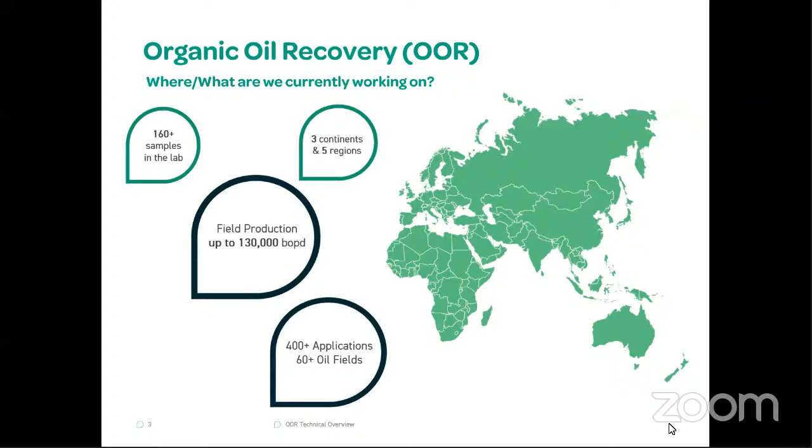So basically, where did this organic oil recovery technology come from and what is the science behind this? From the name, it's already clear that we are using organic nutrients and organic components for enhanced oil recovery. No chemical is used in this one.

15 to 20 years before, the scientists didn't believe that microbes or microorganisms live deep down in the earth. But after 15 years, research has shown that microorganisms live deep down in these layers in the sedimentary rock where oil and gas can be trapped. And they can use this technology, these nutrients, to recover the oil which is already trapped.

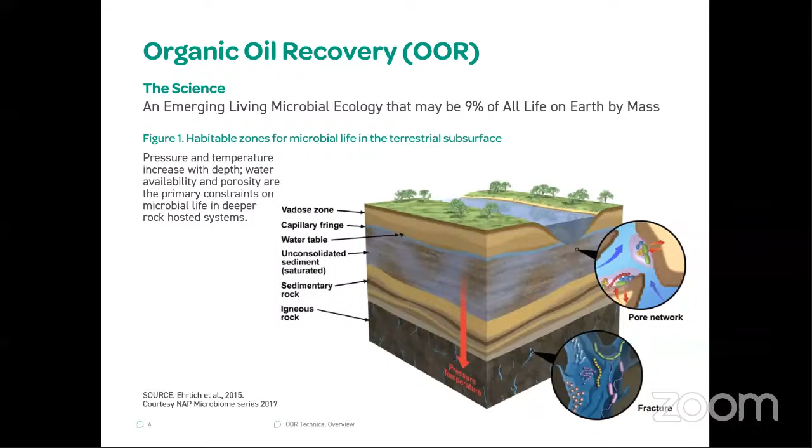So now we will see what is the science behind organic oil recovery. Organic oil recovery is a unique method where they inject nutrients into the oil reservoir and manipulate the existing microbiology of the reservoir. We are not injecting any foreign bacteria to the reservoir, but just manipulating the microbes which already exist there. By this method, you can increase production through applied microbiology, and this can also reduce H2S as a side benefit, increasing oil production using only resident microbiology. We are not injecting any foreign bacteria from the surface like in other microbial EOR.

This technology is one of the cheapest EOR methods in the market, and it reduces H2S as a side benefit. Globally, we have 400 applications over 4 continents. This is a true enhanced production by releasing the trapped oil, not only accelerating it.

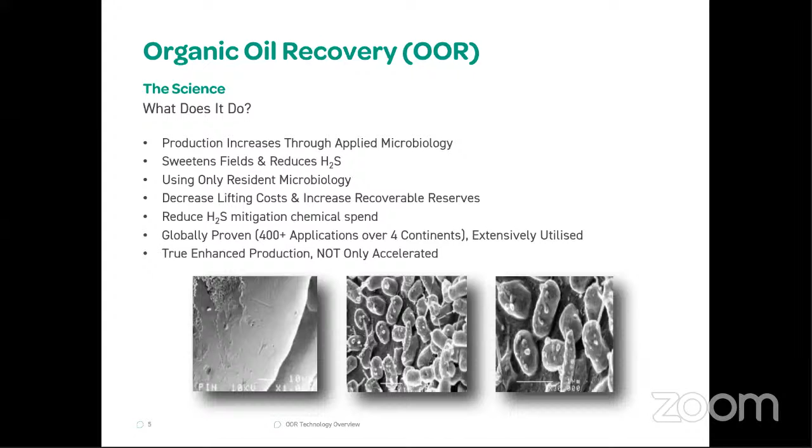So now there will be a question: what is the difference between microbial EOR, which has been in the market for many years, versus organic oil recovery? We are very different from microbial EOR. Microbial EOR injects foreign bacteria into the reservoir, and sometimes injects sugar-based nutrients, plugging the reservoir pores. While in OOR, we are not injecting any bacteria, but injecting special nutrients which are totally organic, and with the help of that we recover oil.

Microbial EOR has a mixed track record. Sometimes it's hit and miss, like 50-50 — sometimes it works, sometimes it doesn't. So they have a very mixed record with microbial EOR. But OOR has a 94% treatment success rate.

MEOR is generic, and they introduce foreign bacteria, and they have several issues like plugging. They use sugar-based nutrients, and because it's aerobic, they end up feeding all the bacteria — the good bacteria and the bad bacteria — which are present in the reservoir. These bacteria can cause a lot of problems in the reservoir, like corrosion, H2S, and other things.

While organic oil recovery is only focused on certain bacteria families, which we call good bacteria, and we are not feeding everyone. By this, it can reduce corrosion, and we can eliminate SRB by outcompeting them. Organic oil recovery is 100% organic, environmentally friendly, and has a stable production from 1 to 3 years if you apply the treatment.

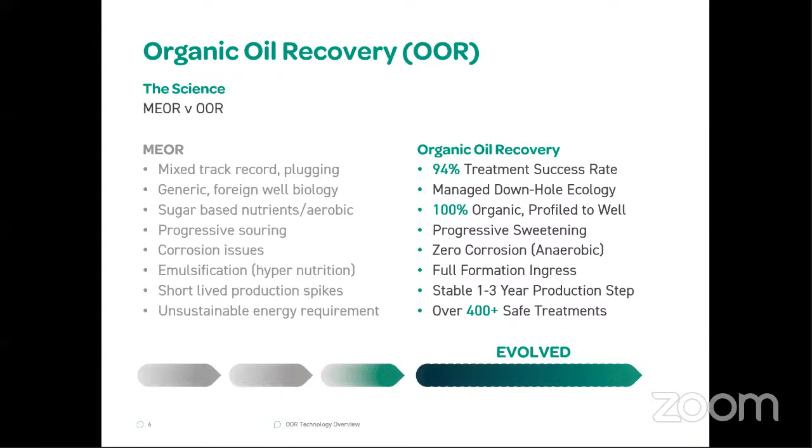So if we do a comparison between OOR and other EOR technologies, like chemical injection, gas injection, chemical EOR, gas EOR, thermal EOR, and all these things, compared with OOR, the new EOR method — with other EOR technology, you need large capex. You need a lot of money for subsurface modification, and a lot of equipment to buy for injection and other things.

But in the OOR case, operationally it is very simple. You don't need any capex, no extra money. What the operator already has, that's what we need. We just need an injection pump to inject the nutrients.

With other EOR, you need 2 to 3 years for implementation — from planning to execution to implementation, it takes a long time. With OOR, from the start of the meeting to implementation, it just takes 4 to 6 months. With other EOR, you need to inject a large volume of chemical or product into the reservoir, but in organic oil recovery, we are just injecting a small amount of nutrients. No need for topside modification in organic oil recovery.

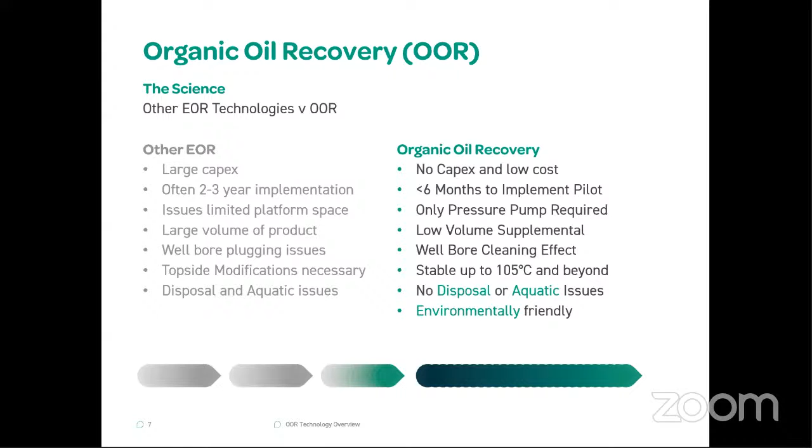So basically, this is the science of how this microbe works, how it can recover oil, how this EOR can help recover the trapped oil, or what we call the residual oil.

In this test tube, 1 milliliter of water contains 10,000 microbes per milliliter. But after injection of the nutrient, these microbes multiply and become a very large number, 100 million per milliliter. So basically what we do is increase the number of good microbes inside the reservoir, and manipulate them to become a large number, millions and billions of microbes in the reservoir, just in hours.

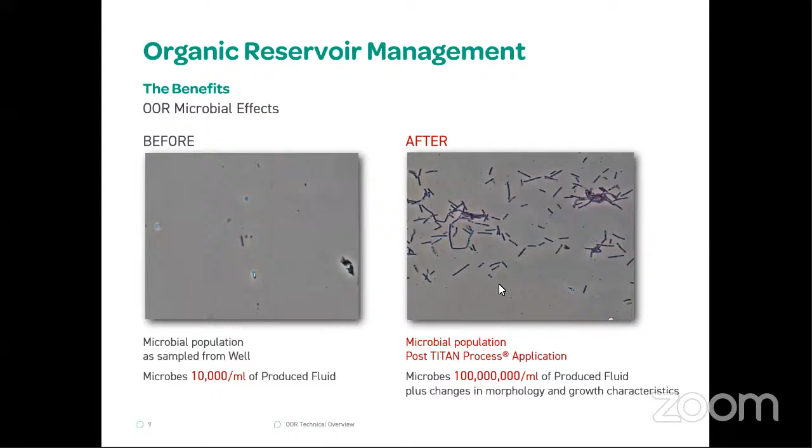So by applying the EOR technology, one benefit is it will increase production. But another side benefit is this technology can reduce H2S. So it's like one treatment which gives you two benefits, by reducing the SRB through outcompeting. So basically this technology can increase production and also decrease H2S by eliminating the SRB.

The sulfate reducing bacteria are already present in the reservoir, or sometimes coming from the injection water. These SRBs produce H2S, which is a very dangerous gas in the oil reserve, and they can cause a lot of corrosion deep down, and it's also not good safety-wise. So with the enhanced oil recovery, the good bacteria eliminate the SRBs, and the SRBs finally die in the reservoir, and then there is no H2S. So it automatically reduces.

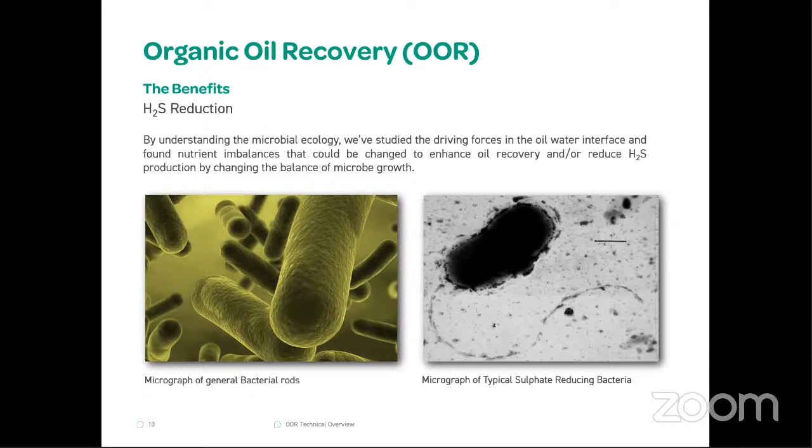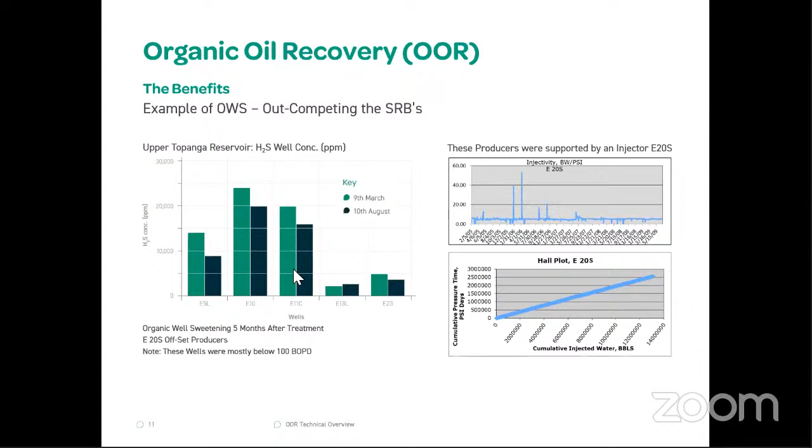Basically, organic oil recovery is a 5-step process, from the starting discussion to the implementation in the full field. First, it's very easy to do a field screening of the reservoir characteristics. We have our own parameters for the reservoir, and by doing the screening, we can see whether this field will work or not.

Once we determine a well will work, we take only a water sample, not an oil sample. We analyze the produced water in our laboratory in California, where microbiologists and scientists study it by applying different nutrients, to see if the nutrient and this fuel combination will increase production or not.

When they confirm it will work, we move to the pilot test. We go to the well and inject the nutrient using a huff and puff process. After that, we do a well test to see how well the technology works.

The worst case scenario is that the technology doesn't work, but we have a 94% success rate — we've never seen it not work at all. Sometimes it produces less oil, but most of the time production increases 100 to 1,000 times. This technology is ideally suited for water flood fields.

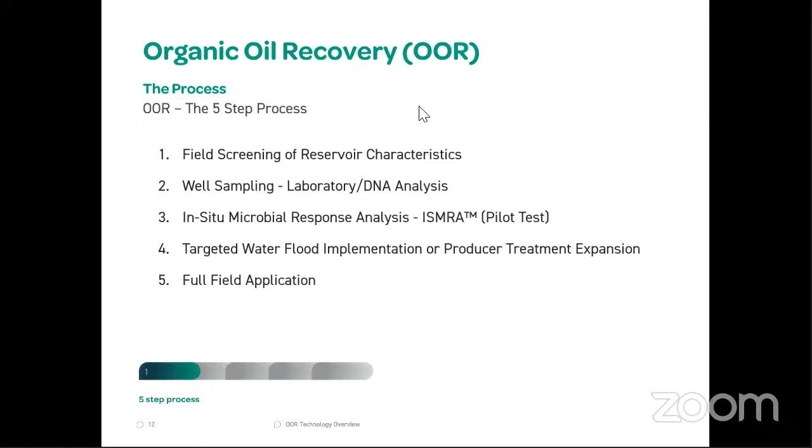For organic oil recovery, we have a sweet spot where we can determine whether a well or reservoir will work under this technology. We have a very wide range of oil gravity — from 12 API to 42 API. If the oil API is within that range, this technology will work.

The water pH should be from 6 to 8, which is quite neutral. The reservoir temperature should be less than 105 degrees Celsius — the hotter it gets, the more the microbes become inactive or may even die. So the optimum temperature is 105 degrees Celsius, the produced water salinity should be less than 215,000 ppm, and the reservoir permeability should be greater than 1 millidarcy.

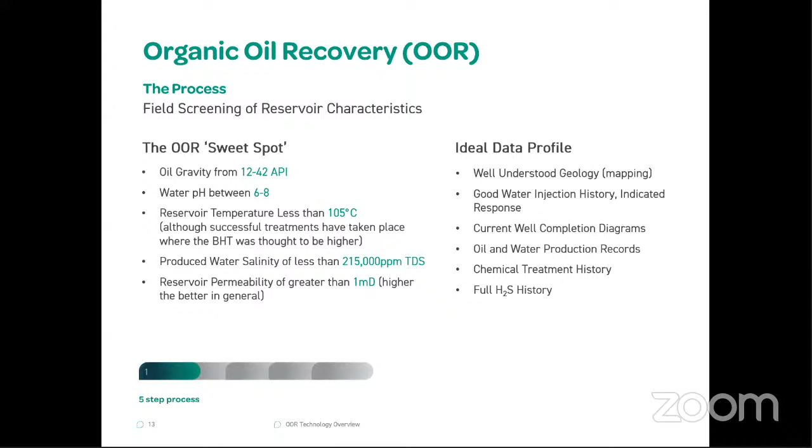The higher the permeability, the better. We need all this information — the more information we have, the better we can do the field screening and prepare the best nutrient recipe for each well. Remember, each well has a different recipe; it's not just one recipe. We have more than 500 recipes, and different wells and reservoirs require different, complex recipes.

It's very simple — for sample collection, we use this jug to collect fluid from the wellhead, then let it sit for separation. Once the water and oil separate, we collect the produced water in bottles and dispatch it to our lab in California for analysis.

They analyze the RNA and DNA to identify all the microbes in the reservoir — what kind of bad bacteria and good bacteria are present, what families they belong to — and from this analysis, they prepare the recipe.

Once the operator is satisfied, we move to the pilot and inject a very small amount of nutrient — starting from 1,000 liters. Normally in chemical EOR they inject thousands of barrels per well, but here it's only one, two, or maximum three to four barrels — a very small amount so you're not disturbing the reservoir too much.

In other EOR methods, there's a risk: if you inject too many nutrients or chemicals from the outside, you end up disturbing the natural zone of the reservoir.

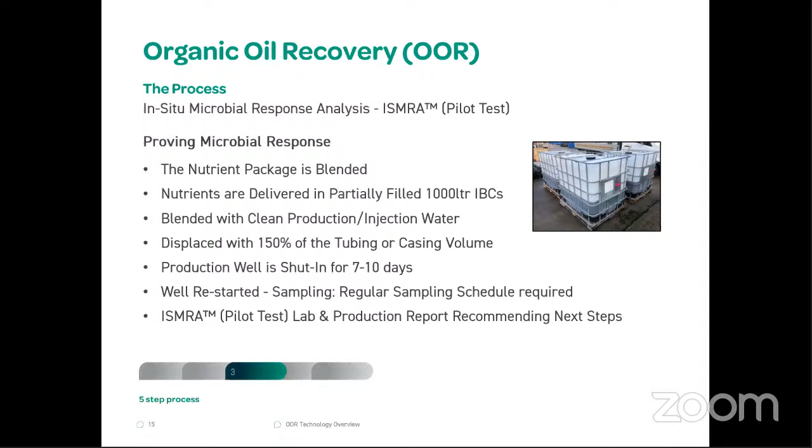So basically, we have recently a pilot test from the North Sea. This field was operated by CNOOC. CNOOC is an operator in the North Sea. This Scott is a very famous oil field present in the UK continental shelf. It's a mature field producing since the mid 1990s, and this is a Jurassic sand.

So this technology, the organic oil recovery, is basically working in both formations. It works in carbonate and also works in sandstone. But microbial EOR works well in sandstone, while its success rate in carbonate is very low. But this organic oil recovery works formation-wise in both.

And the bottom hole temperature of this field was 94 degrees centigrade, and it was a high water cut field, around 85%. The total production of that well was around 10,000 barrels per day total fluid, with 94% water cut. So it was producing around 9,000 barrels of water only. So it's not very economical basically.

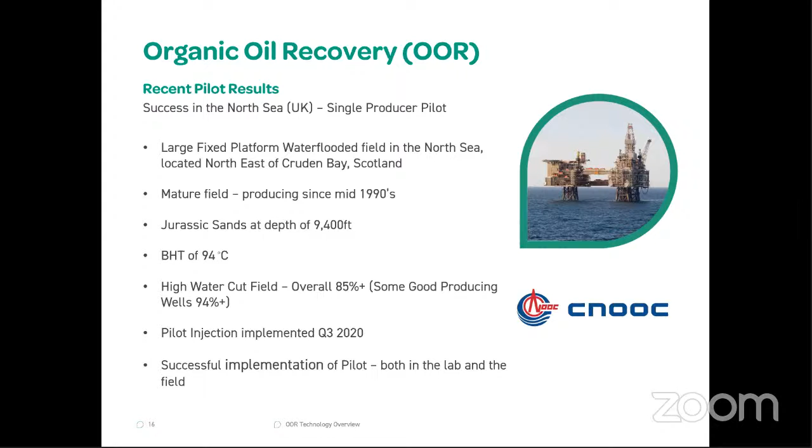But when we inject our nutrients, restart the well, and did a well test, they got 25,000 barrels incremental on only one pilot test from the producer, the H2S was reduced 33%, and the return on investment was more than 1,000%. And also the water cut dropped by 4%. 4% is a huge number for this kind of big well.

And now this company, CNOOC, is going for full field application next year. They are very happy with the results. It's a huge success for us as well, and very good for the operator. And the best part is that whatever they invested in this project, the payback was only 3 days. So they got the whole investment back in only 3 days, and after that, still now they are making profit from this small pilot test.

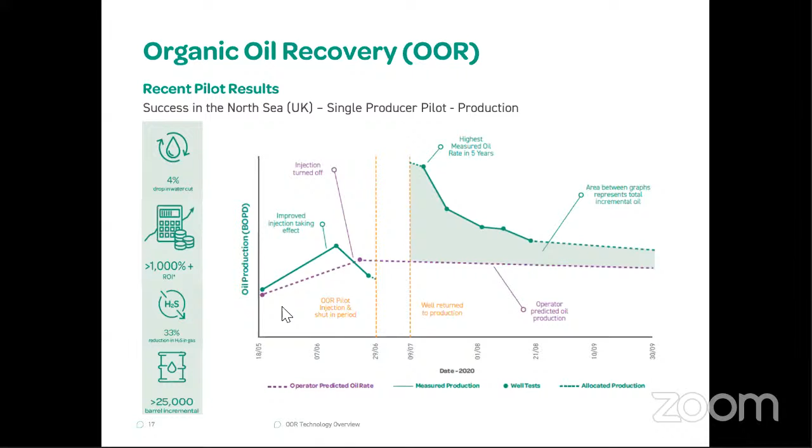So these are the graphs of the water cut. This was before the treatment. The water cut was increasing, and then there was a sharp drop in the water cut. So it's a 4% water cut drop, which means it's like 100 barrels of water they can save. So they don't need extra treatment on this produced water per barrel.

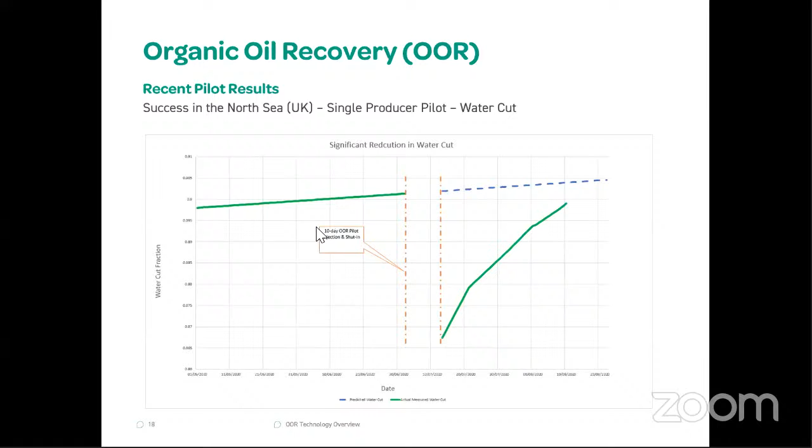So basically on this project, there was zero capex. I mean, there was no topside modification or subsurface facility. There was nothing extra. Whatever equipment they have present on the platform, that's all we need for this kind of technology. But with other EOR methods, you need a lot of equipment and a lot of pumping machines and all these things to inject. And significant incremental oil gain, which was 25,000 barrels incremental, and this was the lowest water cut in the last 5 years basically.

And the best part is that with OOR, there is no change in the oil quality and separation efficiency. So the oil you are producing after the treatment will be the same as before. So this is one of the good things they have. And they also observed a drop in H2S. So basically, with organic oil recovery they have two benefits. One is they increase the production. Another, they reduce the H2S significantly. So it's like two benefits with one treatment.

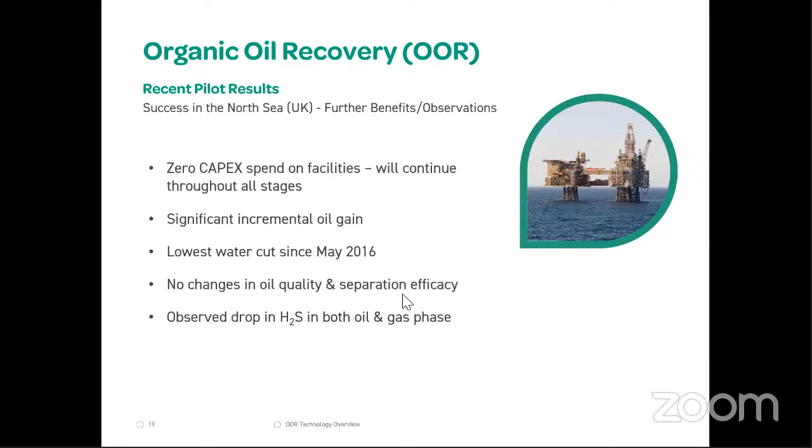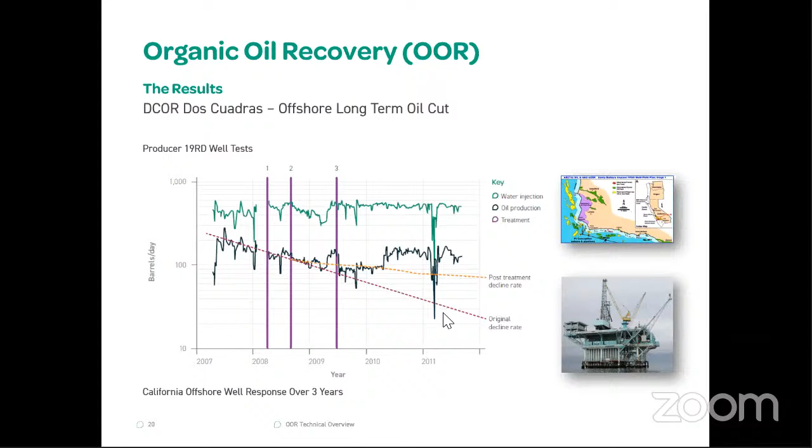Some chemicals you need to inject continuously, like polymer or surfactant. You need to inject a huge amount continuously, and that is the reason they are disturbing the reservoir deep down too much. And when they did the treatment, you can see the post-treatment decline curve. So it's increased. The area under the graph is what they recover and where they make the extra money.

And this one we have from California, and we get the same result for the 3 batch treatment. So this is the field, and we have 6 to 7 SPE papers published. They're already available on our website for more information on the production numbers. And we have 2 SPE papers coming next year. One will be from the North Sea, the result which I showed already, and another one will be from the Middle East.

And currently we are getting a lot of attention and are very busy. And implementing OOR is quite cheap actually. This is a very low cost technology. It's still beneficial for the operator even if the oil price is 30 USD per barrel. So it's still profitable at that kind of low oil price.